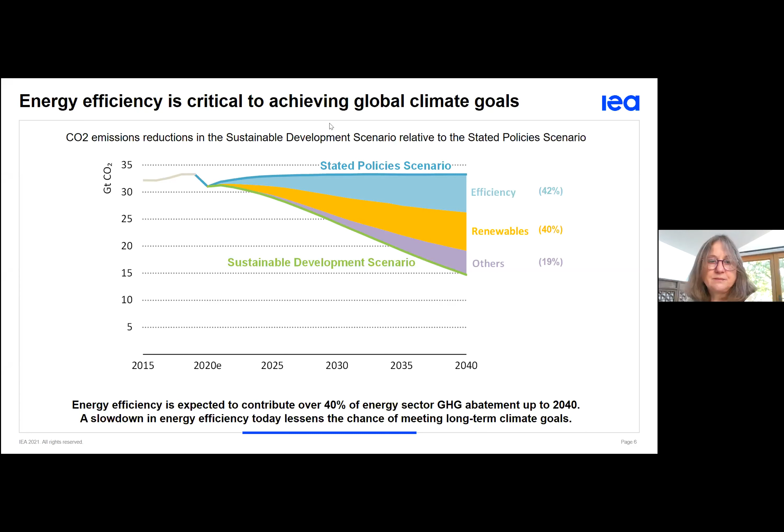The problem is whilst we have that 40% of the work that needs to be done by energy efficiency, we're actually seeing a slowdown in energy efficiency improvement. People who remember when the Sustainable Development Goals were established will remember that we were looking for a doubling of the rate of improvement of energy efficiency in those days. So it was a 2.5% improvement that we were looking for. We got there slowly, I have to say. So we were, by 2015, we were doing reasonably well. But because it had taken a while to build up to that level, we already needed a higher rate of improvement. So we already needed 3% really, rather than the original 2 or 2.5. And now we've slowed down even further, and the pandemic has been a real shock to the system. So we're looking at actually needing a 4% improvement, something like that, in order to reach those goals that I just showed in the previous chart. So we have a huge amount of work to do. Buildings, of course, will play a massive role in that process.

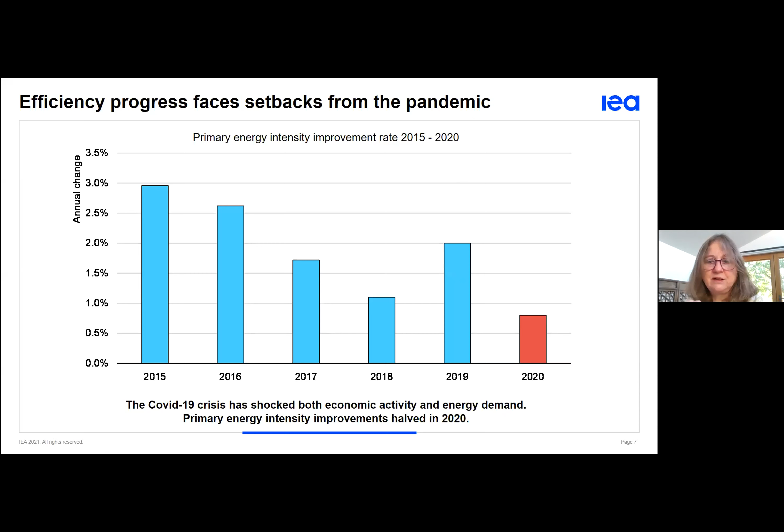Next slide, please. But there are benefits, there are opportunities as well. So in this period where governments are investing in rebooting economies, as a result of what's happened through the very, very sad and destructive health crisis the world has seen, we're saying that we're looking at how you can invest in the energy system to create jobs. And energy efficiency is actually the best place to make those investments.

This is something we're talking to governments about and encouraging. Buildings in particular yield something like 15 jobs per $1 million of investment. The important thing about these jobs is, unlike some stimulus packages we've seen in the past, they're not short-term boom and bust cycles. These are long-term jobs, local jobs, high quality. So they really are an investment for the future—a great opportunity for governments to seize this moment and make something good come out of something terrible.

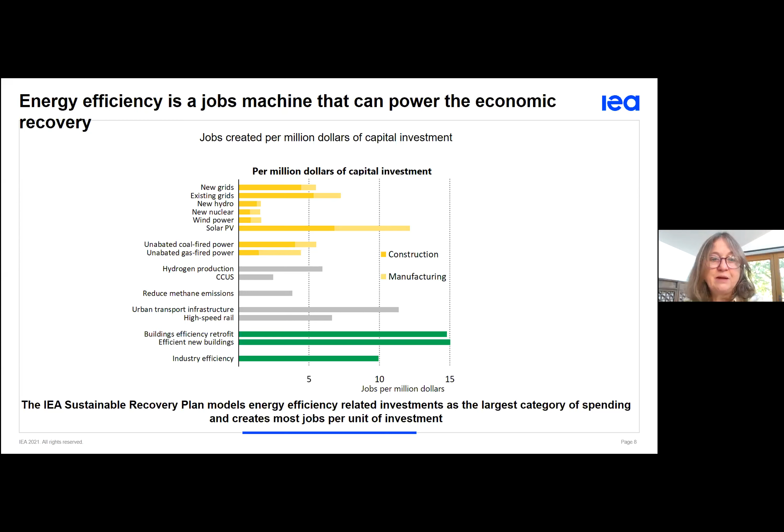We're seeing some of this starting to happen, though it's a bit uneven. Governments have announced billions of dollars in stimulus. The main area that decided to really push energy efficiency is the European Union, accounting for something like 85% of the total declared investment in energy efficiency. These figures need updating, but it gives us a theme—it shows that buildings energy efficiency in particular has tweaked people's imaginations, along with vehicles. That's important for our urban development too.

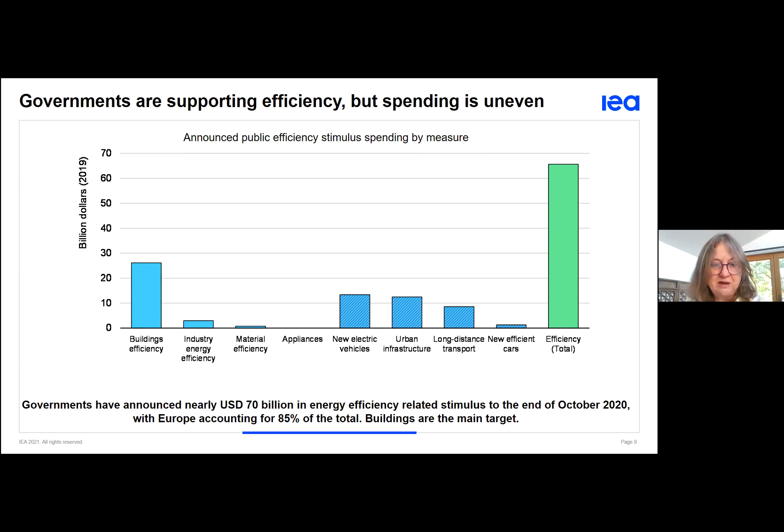Another important thing to note is that we're all talking about trying to reach an early peak by 2030 if at all possible, before seeing the reduction in emissions that we need. The only way of doing that is to really use energy efficiency to its full potential. Otherwise all other options will be too costly, and we'll miss the opportunities we have.

But the good thing is, if you look at the right-hand side of this chart, we have the technologies to make the changes we need. We know what they are today. Three-quarters of what we need for decarbonization technology-wise could come from what's already there. So it's not the case that we need massive innovation, or that there's a silver bullet waiting to be discovered. We can get on with this now.

We also have, on the left-hand side, technology performance—the yellow bar in particular is the important one for our conversation today. That's where the majority of the improvements are going to come from. So we have this package, we know what to do, we need to get on with it, and that's one of the reasons we're here today: to discuss how to use our known technologies and known practices to achieve this change.

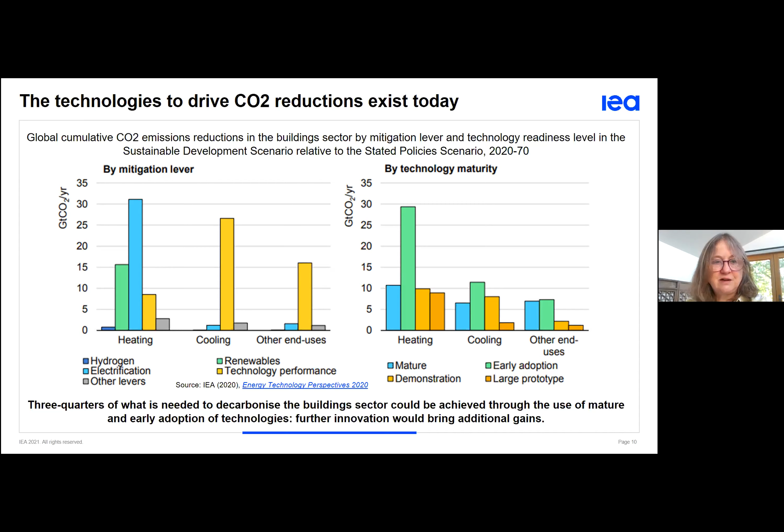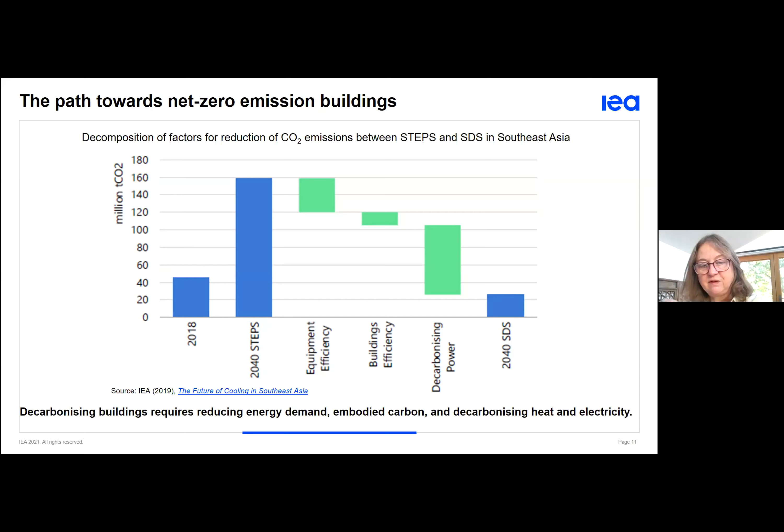Just as a last slide, to see how that breaks down in the context of Southeast Asia, our subject for today: the left-hand blue bar was observed emissions in 2018, our 2040 stated policies is the next blue bar, and then how do we get to SDS, our sustainable development scenario, on the far right-hand side? We get there through improving equipment energy efficiency, buildings energy efficiency, and decarbonizing the power sector. Those are our main chunks, and the course we're talking about today primarily looks at the first two: equipment and buildings energy efficiency.

So that's the finish of my opening remarks. We're now going to pass to Ian Hamilton to give us an overview of the buildings course we're launching today. Ian, the floor is yours.

Thank you, there we go. Thanks so much—once I was taking control of the slides, I couldn't unmute myself. Thank you, Mel.

And for all of you joining today, I'm very excited to be able to launch the online course for energy efficiency in buildings. This is something which, as someone who works in education, is a really important tool in progressing and furthering what Mel has just been describing around energy efficiency for buildings.

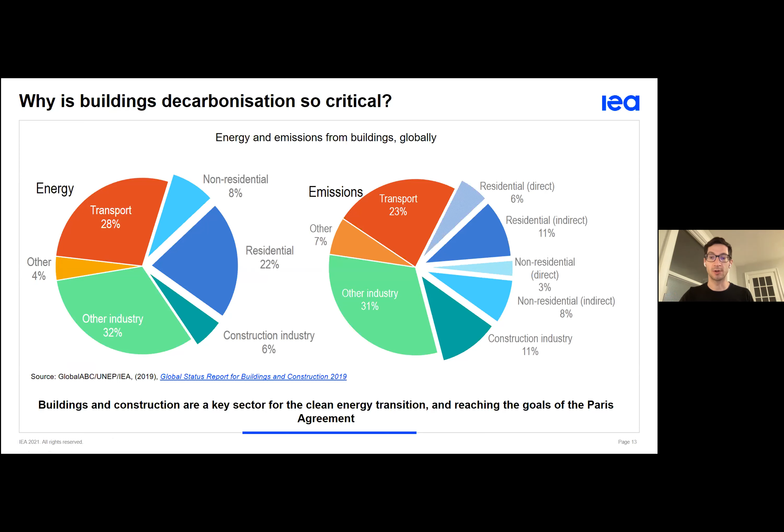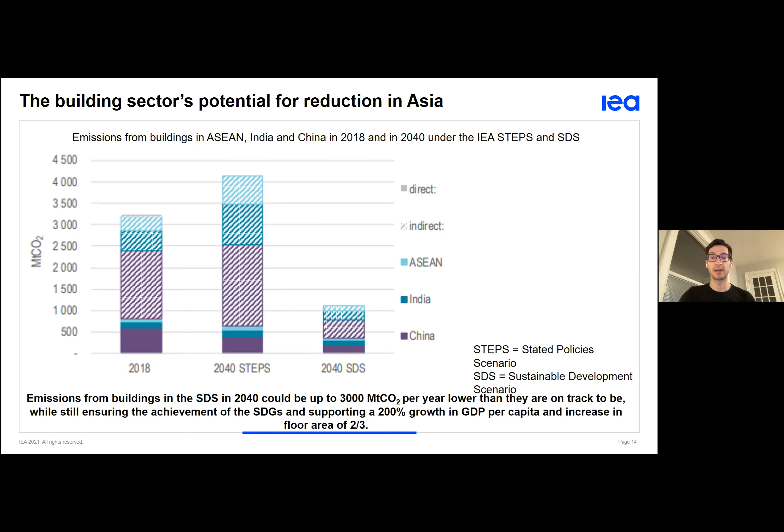Where is this going to be happening? If we look at CO2 emissions, and in particular, the appliances and the way in which buildings are being built in terms of their fuel usage, a lot will be riding on emissions reductions from the electricity system, but importantly also the performance of the building itself in terms of the fabric, how much heat or cooling is needed, and the appliances within.

These improvements are really vital, especially for the ASEAN region and Southeast Asia, to consider how we build better buildings going forward. The online course for energy efficiency in buildings is focused on building the fundamentals and expanding what policymakers, and those who work with them, understand around energy efficiency.

More explicitly around energy efficiency policies for smart cities as well. So this is a suite of courses that are now ready to go and available for registration to begin. This is what we're really excited for today. And why did this course get developed?

Fundamentally, we have both new buildings being designed and old buildings being refurbished, with a focus on quality of life, reducing environmental impact, and being part of the transition towards a decarbonized building sector. Importantly, it's also a stimulative activity that creates a lot of jobs. We spend a great deal of our time indoors in buildings, and the way we use them has changed and will continue to change. It's one of the important areas for growth in an economy.

The number of buildings is going to grow from what we see today, and that's particularly true in Southeast Asia. Many appliances continue to grow alongside that, and in particular, air conditioning ownership could increase 7.5 times by 2050 in Southeast Asia.

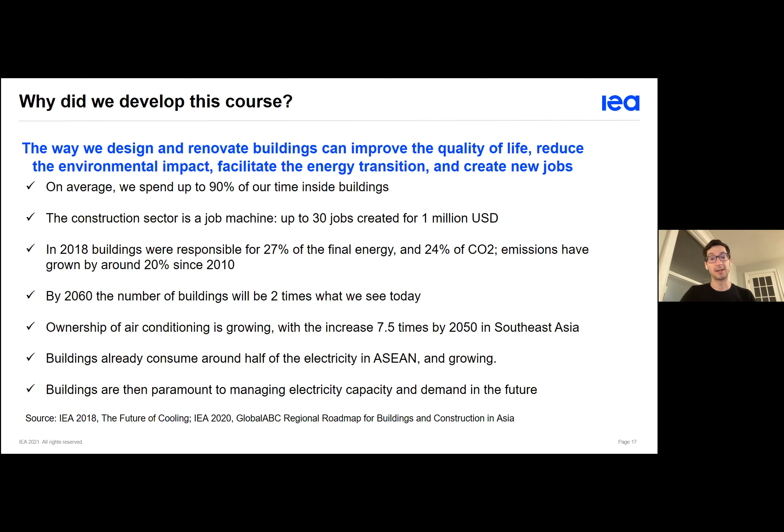Buildings are also an important part of the overall picture for ASEAN in terms of how much electricity is being consumed and will continue to as part of that demand. So really, buildings in the region are incredibly important. What this implies is that to protect for the future around how much energy is used and the cost to consumers and building occupants, building and refurbishing so that they are most efficient is really vital. So what does the course do?

Well, it gives you an understanding of what energy efficiency in buildings means. It tells you about the technology and design options available to improve energy efficiency of buildings. It describes the policies and the various forms in which they can be applied, and also outlines the investment and financing for energy efficiency in buildings.

Policies and finance are really vital to improving what we're doing with buildings, but so too are codes and the role of codes and building standards around how to structure and promote energy efficiency in buildings. So we also describe the ways in which you can measure, evaluate, and verify energy efficiency.

This is really important to be able to determine: are you on track? What is working? What is not working? And then who's responsible? Who are the different actors who can be involved, and how do they participate to ensure that building improvements are happening?

And then there's a variety of other additional resources in terms of workplace for energy efficiency issues in buildings. This is meant to be a place that you can go and learn, but also come back to and access the resources that the IEA has for this journey.

So who is it for? It is designed for those making policy decisions, whether at the national, state, or city level. It's for architects and engineers who want to better understand the details around energy efficiency and design ideas. It's focused on those who might be in financial institutions, and finally also research organizations, NGOs, and anyone else really interested in energy efficiency more broadly. I think this course can offer a lot.

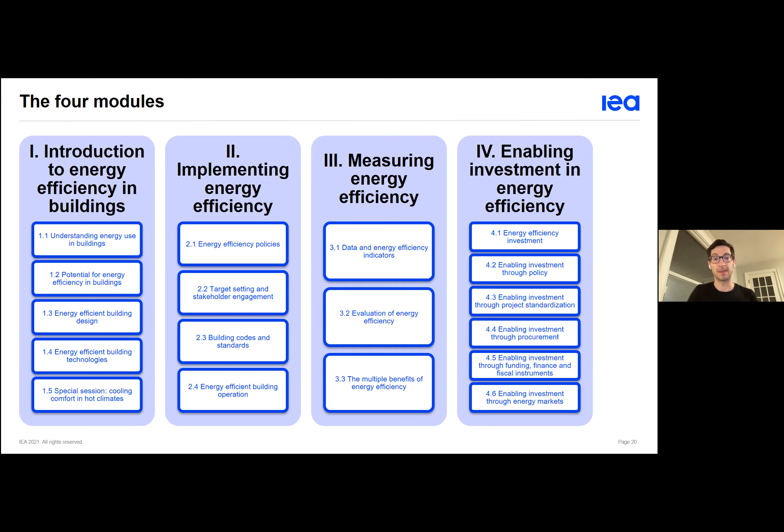The format of the course is based on the MOOC model, the Massive Open Online Course model, and it's available 24 hours a day, 7 days a week. It's approximately 30 to 40 hours of course time across 6 to 8 weeks to complete. There's a variety of material available: videos, reading, slides, examples from Southeast Asia as well as other countries. There's downloadable content, and one evaluation per module. There's also a final evaluation, meant to really ensure that you have a good understanding of the content.

Importantly, there's also a link through to the IEA Energy Efficiency Policy in Emerging Economies LinkedIn group. We see this as one of the ways you can interact with instructors—some of the course instructors—but also within the wider group and community working together on this. In terms of certification, if you complete over 75% of the module, you'll receive an overall certificate, but we of course encourage you to complete the whole thing.

What to expect? This is an example where there are videos—instructional material, videos from our experts at the IEA speaking about different angles of energy efficiency, whether that's policies or technologies. There'll be detailed understanding around certain concepts, or illustrations of analysis undertaken with the IEA and partners. And then a series of evaluations and tests to make sure the information is really founded.

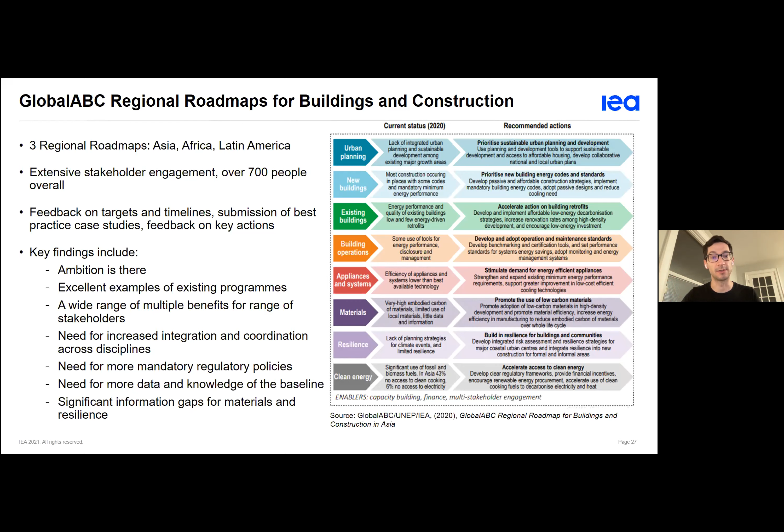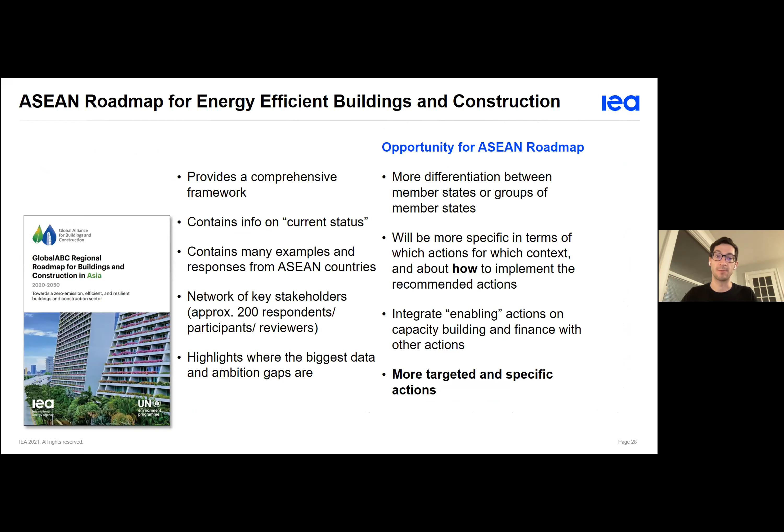This builds on our previous roadmap exercises, looking at regional roadmaps, which were high-level but extensive work covering policies, technologies, current status, and recommended actions to be undertaken. The work we're doing with the ASEAN roadmap is really to build on that regional activity and engage with yourselves to understand and describe the strategies for how those roadmaps could be implemented to achieve a more sustainable construction and building sector.

One of the things we'll do over the next month or so is continue to build on that, and we really invite you to participate through a survey process and an engagement process. I won't take too long, as these slides will be available for others to see, but it covers a variety of themes in addition to buildings themselves: the urban environment, clean energy, and resilience of buildings.

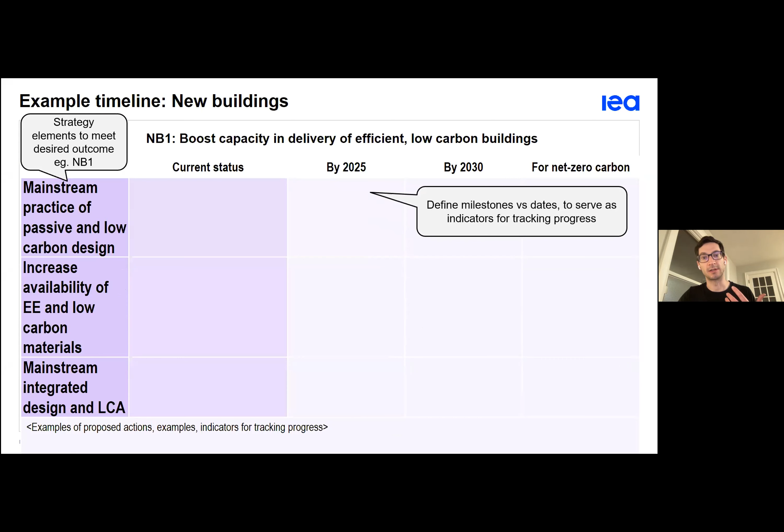We go through a process of building up from the bottom, again focused on strategies. What we're aiming to do, with regionalization and strategies in mind, is build out a picture of how we implement. So we continue to have strategy elements, milestones for what could be achieved by what time, and then also targeted actions that could be undertaken by different groups.

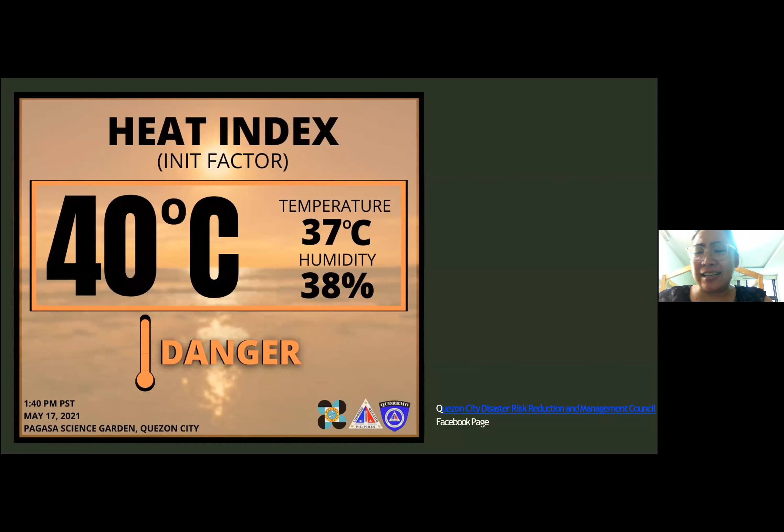That adds to the increase in the need for cooling energy here in the Philippines. And then factor in that we're still in lockdown because of COVID-19, so a lot of people are mandated to stay indoors. I saw in Ian's slide that we spend 90% of our time inside buildings, but because of the lockdown maybe it's around 98% now. So you add the fact that it's very hot, the increasing temperature due to climate change, and the lack of green spaces where people can go for a break from being indoors, and you see the huge potential for energy efficiency, especially when it comes to cooling here in the Philippines.

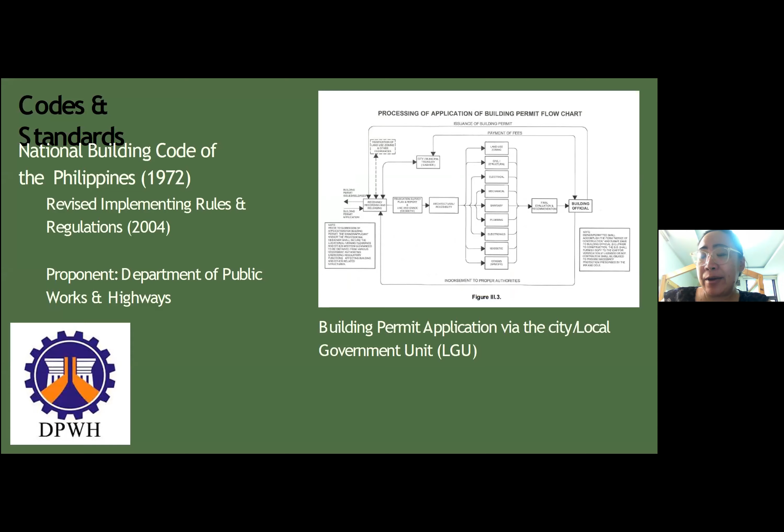But there's still a bit of good news when it comes to energy efficiency. In 2015, finally, the Philippine Green Building Code was created. I think this one is just the same as the National Building Code. The proponent is the Department of Public Works and Highways, but this one was created with help from professional organizations in the built environment, and funding from IFC. This was in 2015, but the sad thing is that it was only issued as a referral code, meaning it is not mandated, unlike the National Building Code where you have to follow the standards and codes inside it. This one is just like a referral.

There were some pilot cities that were able to implement the Philippine Green Building Code, but the sad situation is that it's not being used nationwide. Only several cities are using it, and it's not mandatory. This was done in 2015, and six years onwards.

I'm speaking from a professional standpoint. I haven't heard any feedback on how it is now, because usually codes are reviewed every five years. So I'm also curious on my part, what has happened since then? So this is on the government side.

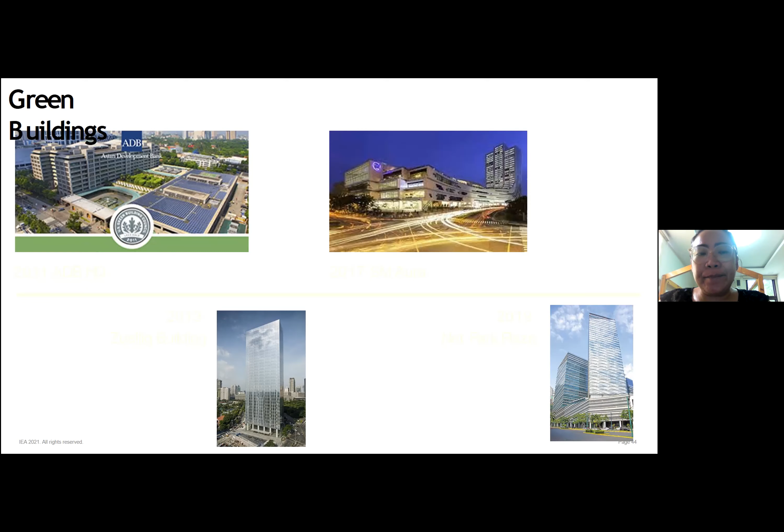But flash forward to 2019, it has really grown exponentially - the knowledge on green buildings, the professionals working on it, and even the appreciation of the private sectors like developers. They've seen the benefits one can get from having green buildings and having your buildings rated.

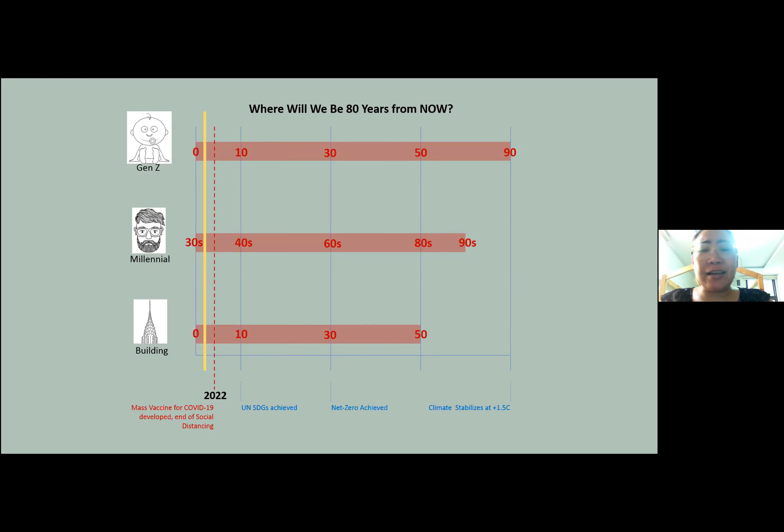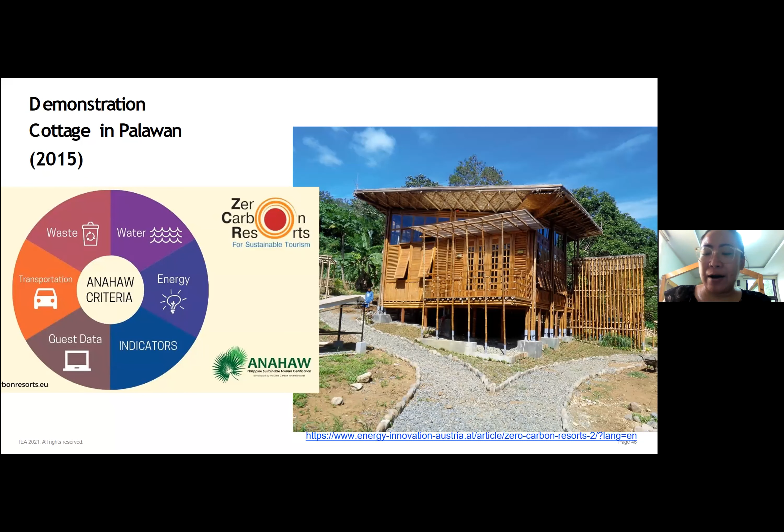And then my last slide is just, I usually show this to my students in architecture, and it's really about thinking about sustainability and why are we doing so much effort with regards to energy efficiency, climate change, and sustainability.

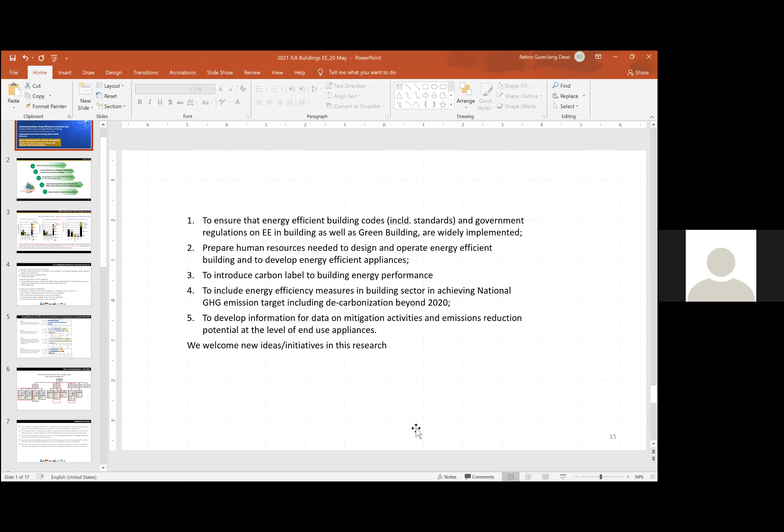Thank you very much, and good afternoon from Indonesia, but now maybe in Europe it's still morning here.

I would like to share my experience in advancing building energy efficiency, particularly in Indonesia, related to how energy efficiency activities serve as mitigation measures for our NDC, the nationally determined contribution already submitted as part of the Paris Agreement, targeting 2030. I would like to share how to quantify the emission reduction from these mitigation measure activities.

We can also use this model to quantify emissions at the city level, maybe the region level, as well as the national level or in Southeast Asia. This is the idea of how to assess this.

I would like to group our discussion into 5 parts. First is talking about greenhouse gas emissions in the energy sector, and part 2 is energy efficiency as a mitigation measure — not only as mitigation, but also as a new source of energy, because when we make it efficient we can use it for other purposes.

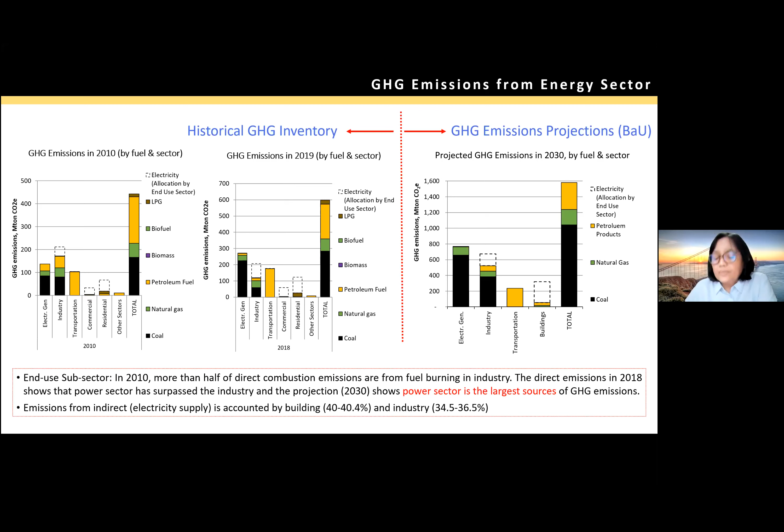We see energy efficiency measures on the demand side. First, we have a target in energy efficiency for 2025: 6% in industry, transport, household, and commercial building. This household and commercial building figure is almost 6%, but the percentage is not for the sector alone, it's for the total sector.

Efficiency standards and labeling implementation make things more efficient, and now I think many countries have implemented this. Also, efficiency standards, even without using standard labeling, because of trajectory technology, efficient appliances can be used by all sectors.

Indonesia's NDC 2030 also has a target for how much energy efficiency can reduce emissions in one country, and other countries' NDCs can also contribute to reducing emissions particularly through energy efficiency.

Energy efficiency measures on the supply side: yes, of course, even if we work hard on efficiency on the demand side, if the supply side still has a high carbon footprint, it seems like nothing, because the emissions released indirectly are still high since the supply side is still using more fossil fuel, particularly coal, and the carbon footprint is still high.

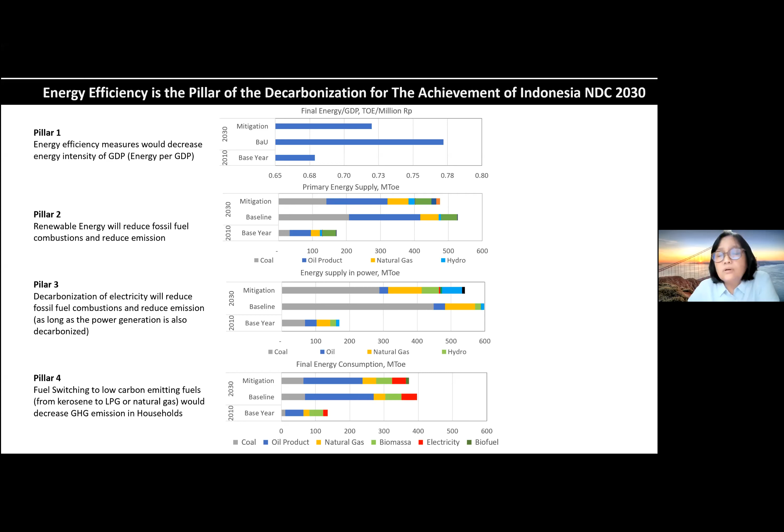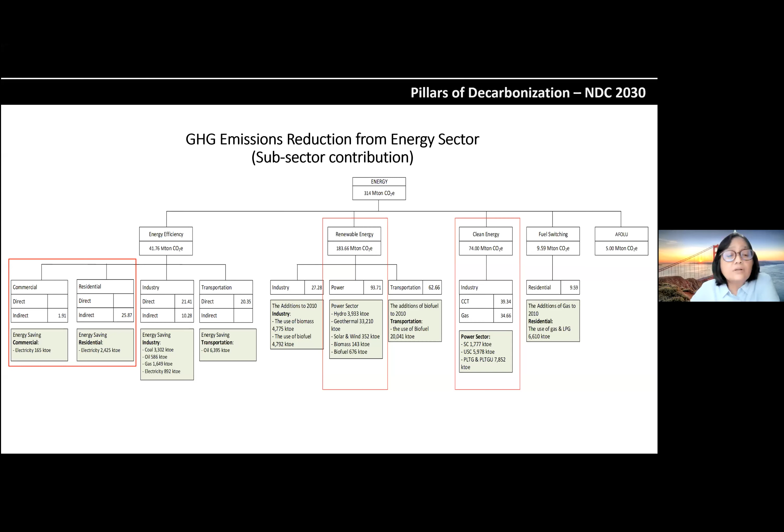The dynamics of buildings are driven by population growth, economic development, per capita income, and commercial sector development. For residential, increasing per capita income increases energy demand as well, and for commercial buildings, increasing size of the service economy and modernization of building equipment will result in increased energy consumption.

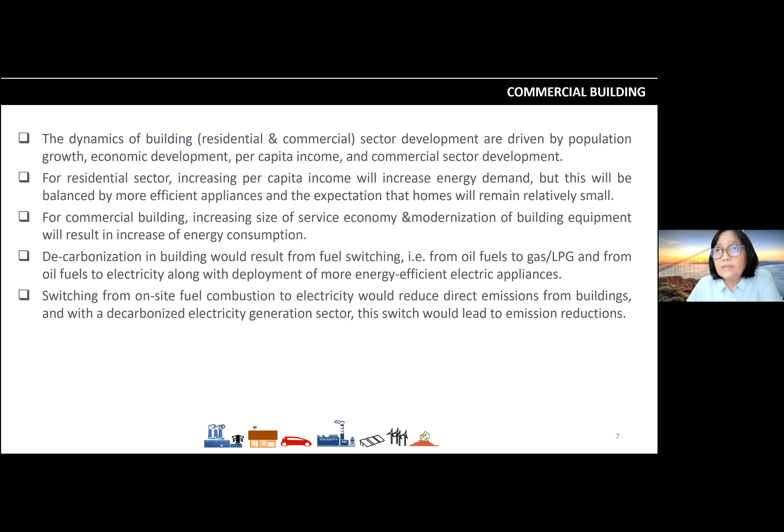Decarbonization in buildings would result from fuel switching, and the biggest impact comes from energy efficient electric appliances. Also, switching from on-site fuel combustion to electricity would reduce direct emissions from buildings, and decarbonizing the electricity generation sector would give an even greater impact on GHG emission reduction.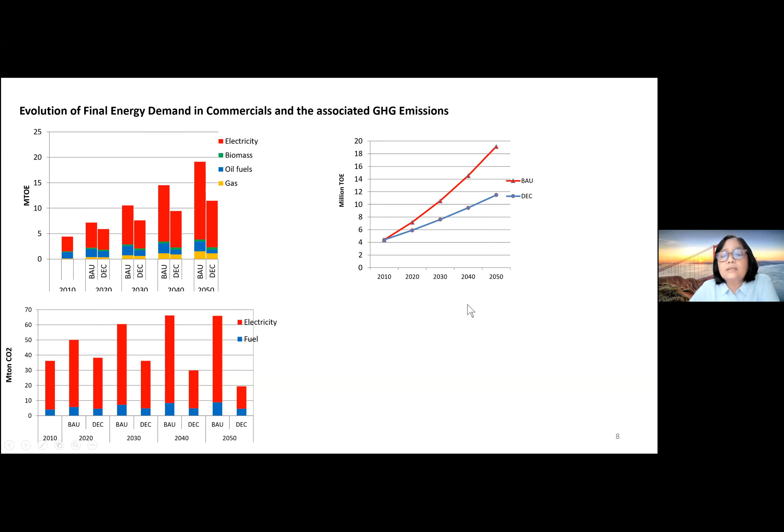And then this is the total reduction that we can achieve in 2050. But I have experience on one case only, if efficiency standard and labeling as policy measures, and then what happened for the result of the model itself, similar like this one, this in the national level, but focused on the commercial building, and this one is focused on residential as well as commercial.

This is the parameter that we use: GDP, population, household, and also some other parameters like the area of the building and also the household, number of households, and then how they can increase the area because of the development in this subsector.

And then this one, the right one, this is the kind of technology that we use: cooking, lighting, etc. And then if we do nothing until 2050, this is the share of each of these appliances for energy. Then this is the consumption of this one, cooking, lighting still dominated.

And then how to reduce this emission, we can run the model with the end use model, and then we can have the result if this is the business as usual. And then if we implement the first unconditional target under the NDC and extend it to 2050. And this is countermeasure A, and then another one is countermeasure B.

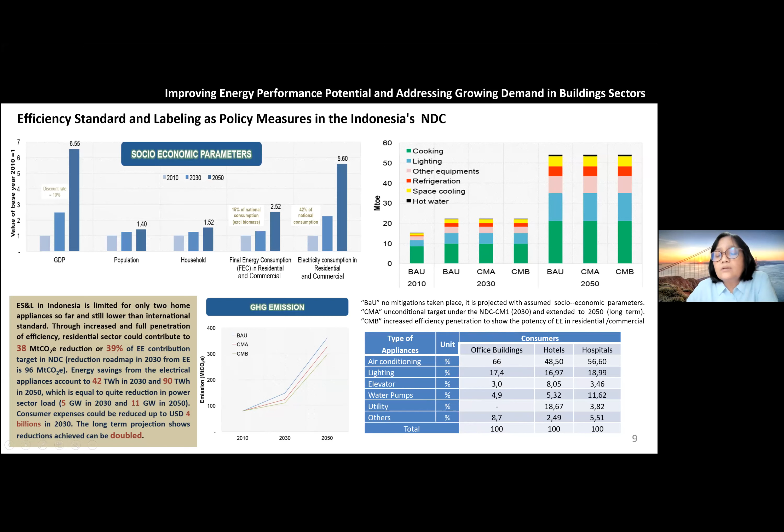And then we have also information about the type of energy, the share of appliances in office building, hotel, and hospital that we can use for the reference here. And then this is the model itself.

The methodology where we have used AIM Enduse is a rather complicated model because we can use the level of type of technology, even in electric appliances. First, we have to estimate service demand. Based on the service demand, we can have how much actually electricity have to supply.

And this one is the electricity service demand, influenced by population growth, economic growth, lifestyle. For example, what happens in 2050, maybe our community is more efficient or still traditional, or modern then expensive, and then need more energy, is not efficient. For example, this is just an example.

Then we can set in 2050 what kind of community will happen, and then we can estimate how much actually the service demand, particularly for the electricity. And then the technology selection and others can be run with optimization based on how much the electric service demand, and then appliances or technology.

And we have a database in one sector. We almost have 100 databases for technology, and also we use energy price as an optimization parameter, energy type, energy constraint, and emission factor, and also fuel availability.

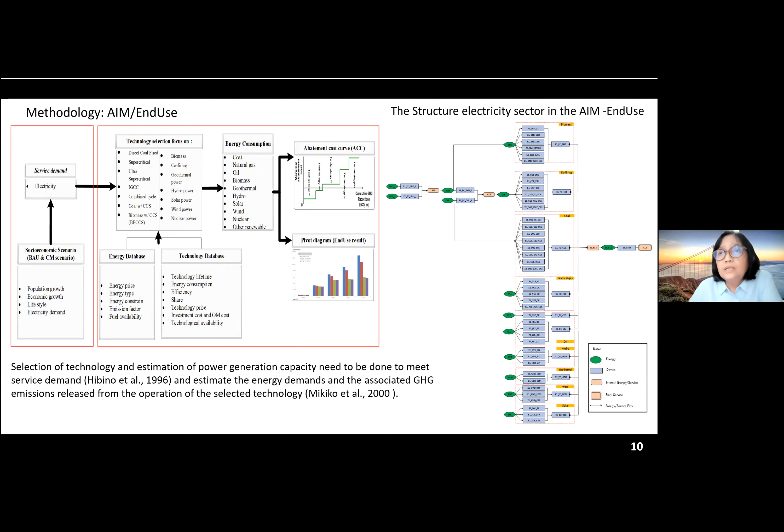But now the rest is only Asian countries, so because of this we now use a global model, a global model between Asia and also Europe. As I mentioned before, we can select this only for the building commercial and household sector, and this is a type of the share of each technology.

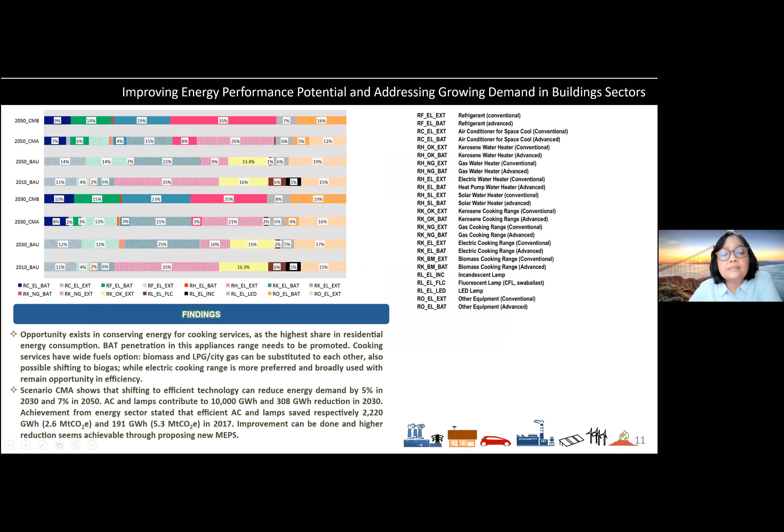And these are the findings, the opportunity scenario, and how much we can actually reduce emissions based on the appliances. There is some of our experience I would like to share, but because there is much to give information, I think from the presentation you can just read it here. Energy efficiency measures on the demand side could be implemented when the following conditions prevail.

For example, ESCO is a good idea, because with support from ESCO, the building can implement energy efficiency, since the cost for investment and operations can be covered by the ESCO. Then the reduction in energy consumption can trade off for the payment of the investment cost and expenditure.

Energy efficiency measures on the supply side could be implemented when the following conditions prevail. I have to discuss the supply side because there is no point if we only focus on the demand side when the supply side does not also reduce greenhouse gas emissions.

The required policy for the above issues includes financial support and incentives. We don't want to use the term subsidy anymore, because why apply for an incentive? Because this is good work, and why shouldn't government give an incentive to people who are already efficient or using clean energy, then we apply for the incentive.

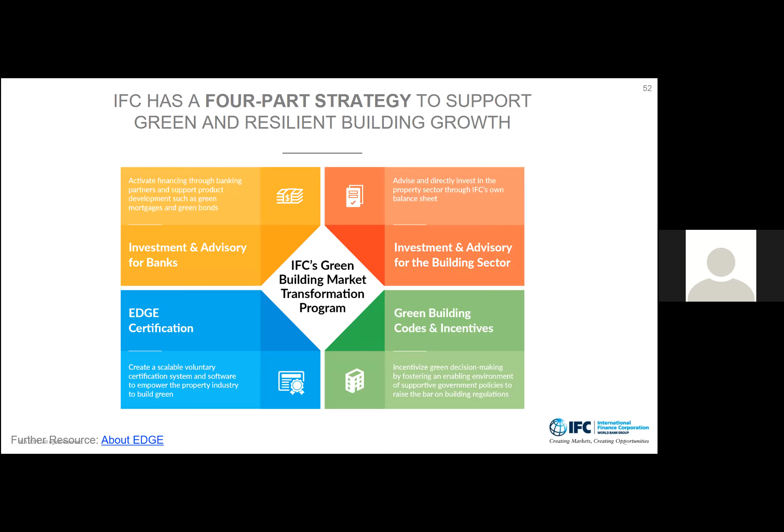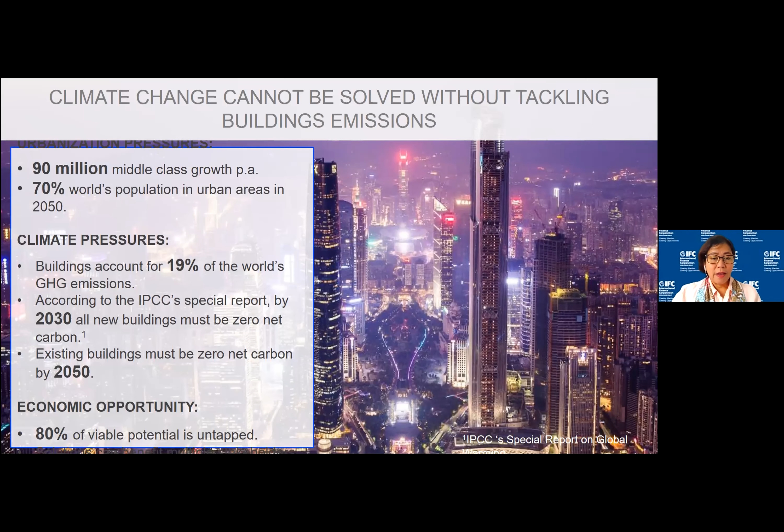The building sector is a major culprit, accounting for 28% of energy-related greenhouse gas emissions, and it consumes more than half of all energy. And it's expected to grow further. By 2060, the total floor space will most likely double compared to what it is today. So how to balance the demand for a significantly larger built environment while minimizing resource depletion and carbon impact is really critical to our future.

So here, IFC really commends IEA on coming up with a MOOC on energy efficiency in buildings, which is very important.

Buildings can pose threats to the planet, but if built sustainably, they actually bring value to all stakeholders, from builders, buyers, and banks. And for policymakers, providing incentives and coming up with regulations for energy efficient, sustainable, or green buildings can really bring results to their nationally determined contributions, for example, and more importantly, also more efficient infrastructure, which can translate into the country's more competitive businesses and economy.

Now let's take a step back and define exactly what we mean by green building. It's not enough to just self-declare that a building has met a standard; it has to be certified by a reputable certification system. And to this end, the building must also be at least 20% more resource efficient, including energy, compared to a comparable baseline building in that local market area. Resource efficiency includes energy efficiency, which is the topic of our discussion this afternoon. And finally, in order to satisfy green building finance requirements, which become more important, projects must have quantified impact reporting, which includes energy, water savings, or reduced GHG emissions.

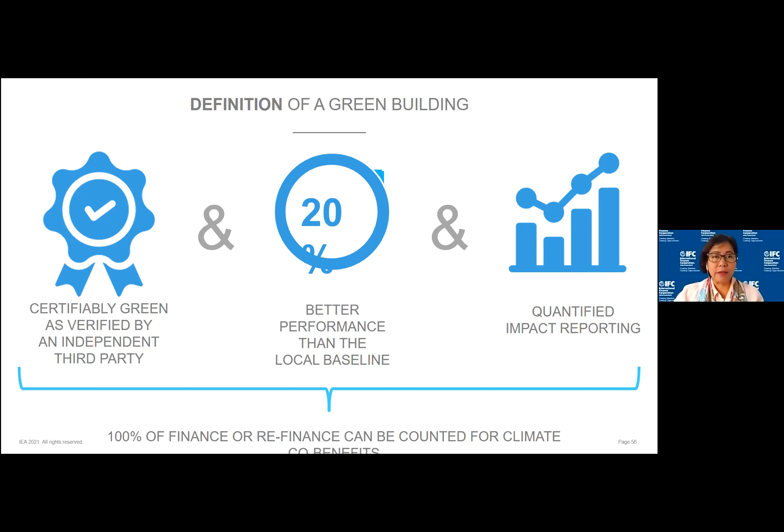To promote resource efficient buildings, IFC, for the past more than 10 years, has developed the green building market transformation programs. Within that, we also developed the Edge software, which is the first of its kind, and it's free of charge for anyone to sign up and use. It's available through edgebuildings.com. The complexity of the application, because it's very simple and intuitive to use, is really hidden beneath the user interface.

So it helps architects, engineers, and investors to make it easy for people to cut back on the resource intensity of their building's design.

Edge is possible across all sectors. It can be new buildings, existing buildings, homes, hospitality, hotels, offices, hospitals, campuses, schools, industrial warehouses, and even airports. One is actually Edge certified, in Clark, the Philippines.

Here is just a sample of our Edge certified portfolio across the globe. You can see various types of buildings covering multiple countries.

IFC has been actively working on this in emerging markets across Asia, Latin America, and Africa, and we're also involved in developed countries, but we focus more on emerging and developing countries.

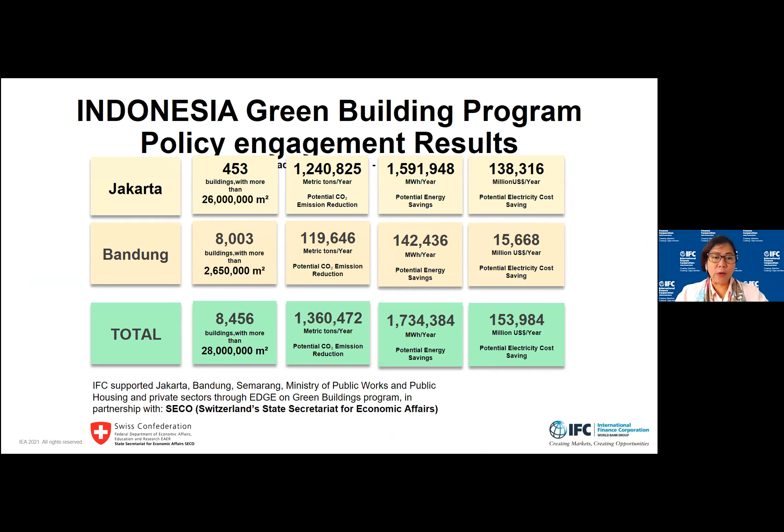I mentioned the green building course in university. This is work we do globally, but to give an example, we work in Indonesia and in Vietnam. In Indonesia, since January 2019, we partnered with 5 universities: UI, ITB, Ibu Dewi's campus, and...

...UGM, ITS, and Undip, where IFC developed the training model and we do training of trainers for the lecturers, who then transfer the knowledge to students as an elective course within the Department of Architecture. This year we've also added University of Tarumanegara in Jakarta, and in Vietnam we've partnered with 4 universities already.

Let's look into the incremental costs and benefits now. Actually achieving 20% savings in energy, water, and materials only requires a few practical adjustments. I think people in the audience today are very familiar with energy efficiency and how you cut it.

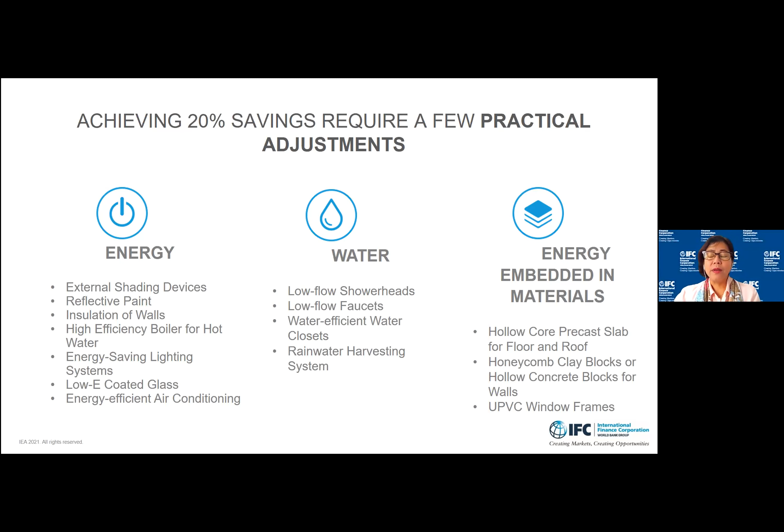Now, talking about costs. It's been perceived that green buildings are high cost and all that, but IFC has done research showing it's actually much lower than market perceptions.

A case in point is Ciputra in Indonesia, where they saw less than 5% incremental costs with a payback period of less than 2 years. Similarly in Vietnam, our partner Capital House reported just a 1% increase. It's really possible to bring this lower if the concept is built in at the design stage, very early in the process.

In terms of the benefits and returns, another IFC study shows that across different types of buildings, the returns are possible and quite high. The payback period across the board is less than 2 years. Of course the incrementals range depending on the type of building, but when you compare the cost and benefit, it's actually quite comparable and significant.

I have a few case studies to show here, but I won't dwell on them much, just to give you a flavor that this has actually been done, implemented, and brings results.

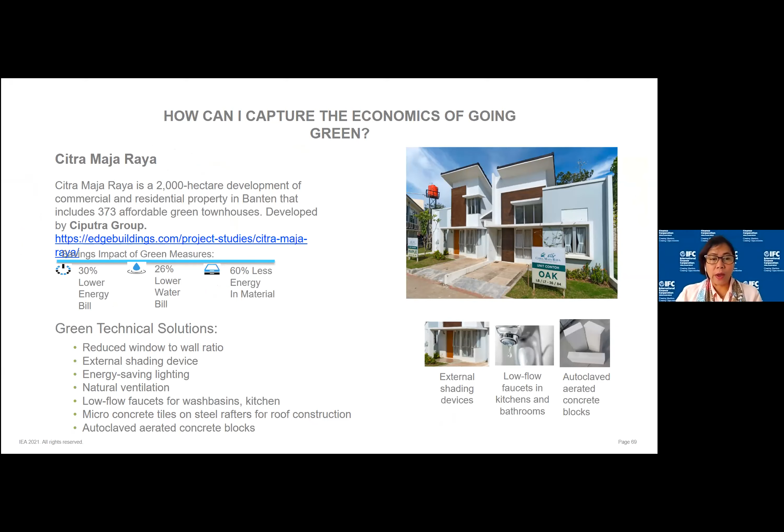Another example from Indonesia: this is Citra Maja Raya by Ciputra. I mentioned the incremental cost is less than 5% with a 2 year payback period, and they're able to save 30% lower energy bills for homeowners.

So what exactly is needed? There's a private sector role, giving examples, demonstrations, and directions. But what's also important is government partnerships.

There are so many implementation issues and challenges, but incentives, if governments put them in place, don't have to be fiscal incentives—they can be others. It doesn't have to be fiscal or tax-based; it can be bonus density, expedited permitting, grants, loans, technical assistance like awareness raising, training, knowledge, net metering, public campaigns, and legislation.

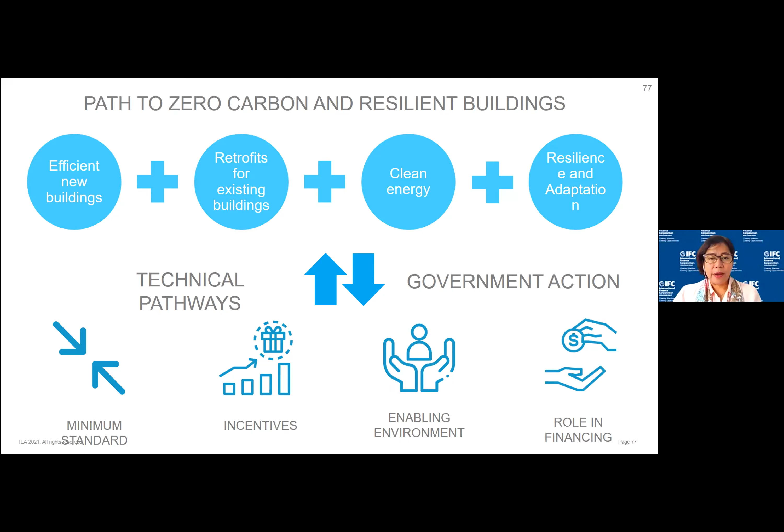At IFC, we begin with 20%, which is the standard, and if people can make their building more energy efficient, we can issue EDGE Advanced at 40%. If they want to go all the way, either through energy saving on site, achieving 100% through renewables, or topping off with carbon offsets, IFC has already introduced what we call zero carbon buildings. We already have an example, happy to say, from Manila.

This is Arthaland, the first Edge zero carbon certification, and they have won awards for that.

The great news is that the tools are already here to make this happen. IEA has introduced online tools as well, bringing in what's required by private sectors, practitioners, and governments. From IFC's side, we have Edge, Building Resilience Index, and Apex for cities.

We also work with finance institutions and have case studies available, plus research, partnerships, and disclosures, including our partnership with CDP. This brings together not just the supply side but the demand side too. We really want to make sure the market is transformed across all these various pieces.

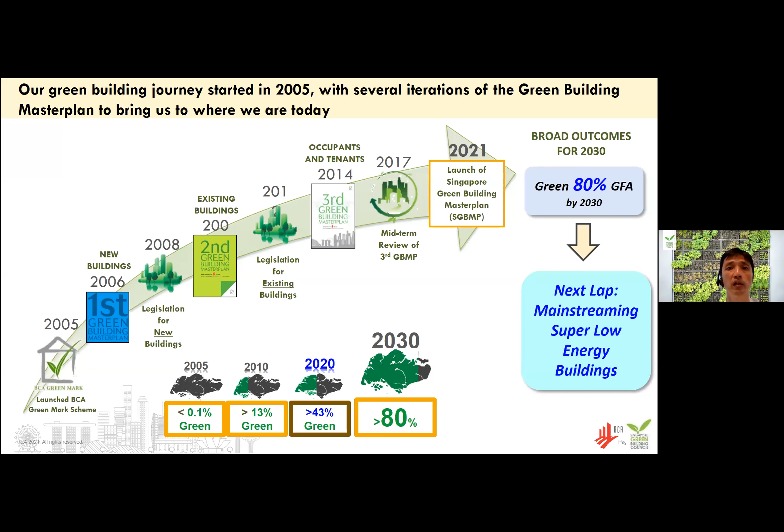In view of that, in 2021 we launched a new version of the Singapore Green Building Master Plan. With this new Green Building Master Plan, we strive for higher long-term ambitions for green buildings, and we want to make super low energy buildings mainstream, pushing for wider adoption of these buildings.

The journey of the 2021 Singapore Green Building Master Plan actually started last year, in 2020. BCA and the Singapore Green Building Council co-led and set up the Master Plan Community, which consists of more than 80 industry stakeholders from different points of the value chain, such as consultants, developers, contractors, suppliers, researchers, and others.

In setting the new master plan, it's important to better understand the barriers faced by practitioners on the ground, as well as to understand from the industry what potential there is to stretch for higher targets. The early decision was to reach out to a wider segment of stakeholders through various engagements in order to co-create this new vision for the new journey.

With that in mind, we successfully engaged 5,000 individuals through the process of developing this new master plan. All this accumulated into the release of the public engagement report earlier this year in February 2021. Through the feedback and suggestions gathered, the committee had collectively shaped the vision, key outcomes, and initiatives that will effectively help drive the green building agenda forward.

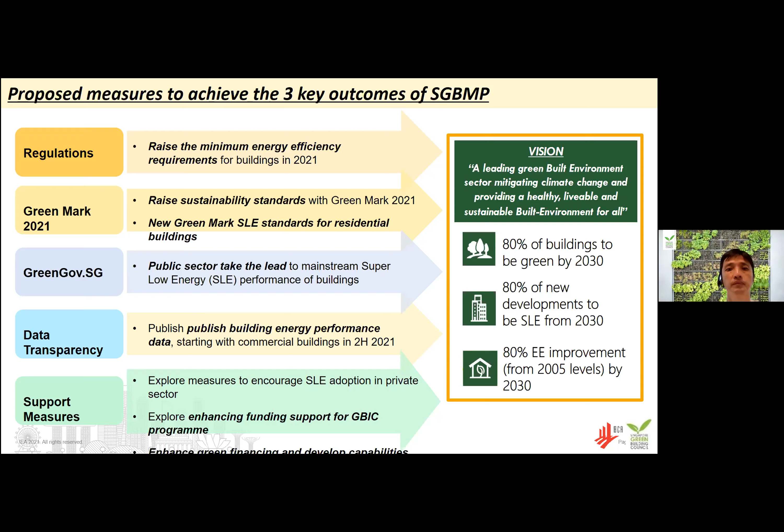BCA will also be reviewing the Green Mark scheme to raise the standards accordingly. Since 2005, Green Mark has... sorry - BCA has raised the minimum energy efficiency requirements for new buildings and existing buildings undergoing major retrofits to be 50% and 40% more energy efficient compared to 2005 levels, respectively. The current standards, on the left side of the chart, are 30% and 25%, so that will be raised to 50% and 40%.

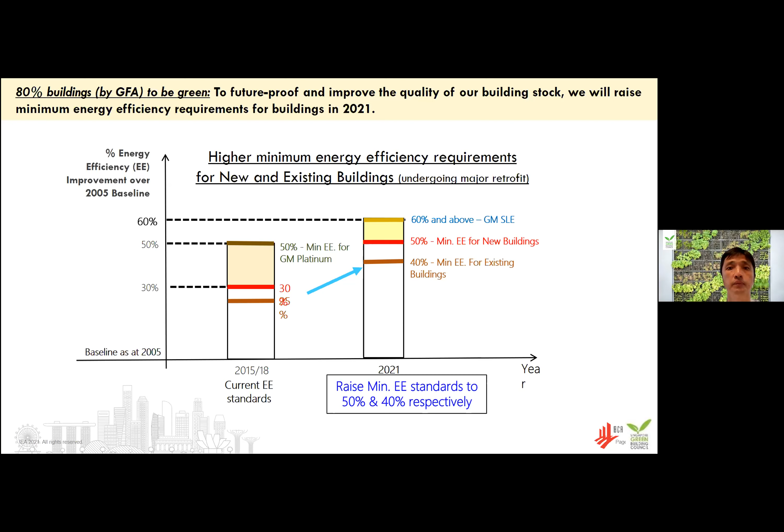BCA will also be reviewing the Green Mark scheme to raise the standards. Since 2005, Green Mark has been a key lever and performance benchmark for various green policies. The new Green Mark 2021 is currently in the piloting stage, so you can visit the website for more information.

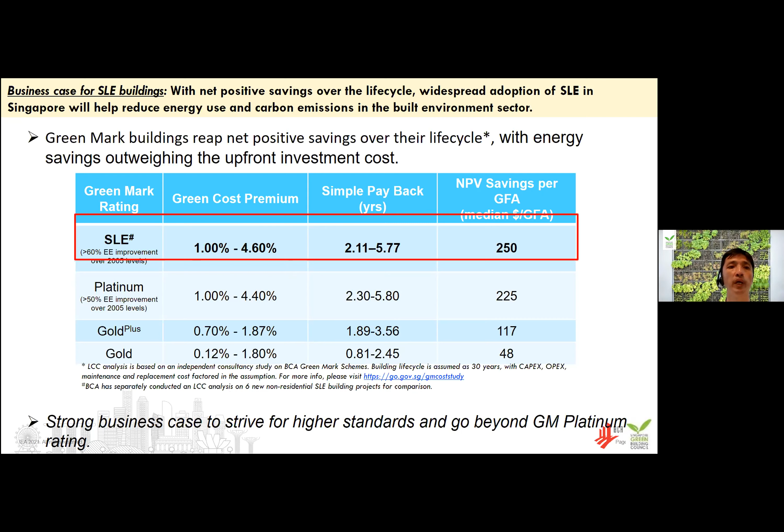Currently there has been encouraging progress on green buildings striving to go super low energy. When we started the super low energy scheme in 2018, there were only 14 projects. Now the number has grown to 43 projects awarded super low energy building certification, with 20 more working towards certification. To further create demand for super low energy buildings, the government will also take the lead to give a stronger push through the GreenGov.sg scheme.

This is the third outcome: to strive for 80% improvement in energy efficiency by 2030 for best-in-class buildings, through the support of research and innovation and deployment of new technologies to the market. There is a Green Building Innovation Cluster, or GBIC, program that supports research and development, and helps researchers and innovators demonstrate green building solutions through prototyping. We want to strengthen research and innovation partnerships and collaborations to develop more energy efficient and cost-effective technologies that can support the push for more super low energy buildings.

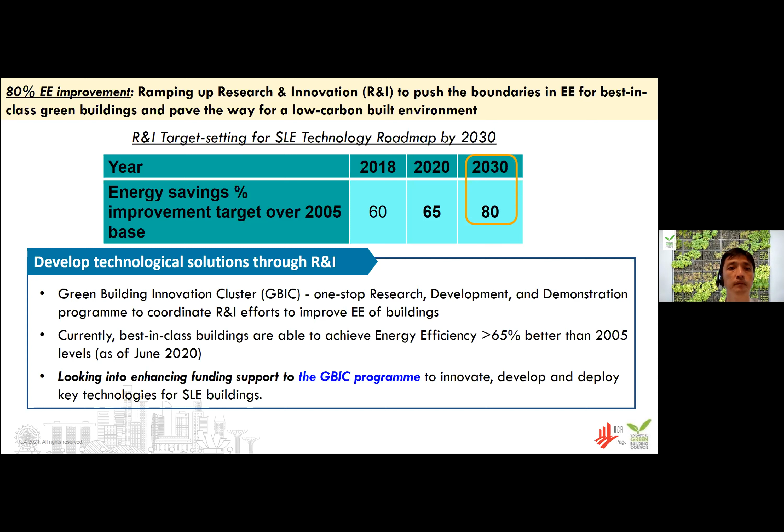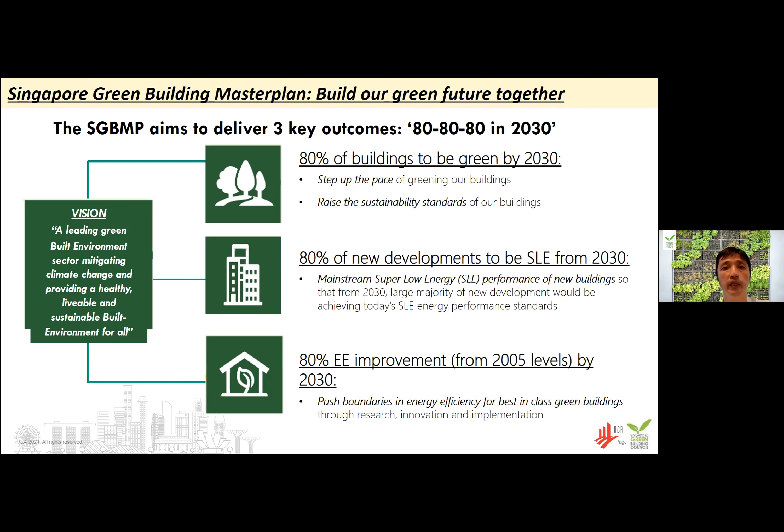In summary, these are the three key outcomes Singapore is targeting to help us green more buildings by 2030 - the 80-80-80 in 2030 targets. That's my last slide, so thank you.

Always impressed with the progress that Singapore has made on these issues, and the kind of leadership shown for the region and globally as well - hugely important examples and experience. I particularly liked your point about data sharing. I think that's something we don't perhaps talk enough about. If all of the separate groups that we need to bring together - different types of stakeholders - to have this nose-to-tail energy efficiency process in buildings, through design, construction, and through to resilience, that sharing of data is a hugely important part of that process.

We've heard really interesting things today that will certainly strengthen the roadmap already that we're working on, as well as contribute potentially new examples to the training. So thank you everybody for that. We have a few moments for some questions.

I would like to kick off by going back to this point about making energy efficient, comfortable accommodation available to low-income groups. Maybe we could just go round the panelists one by one briefly, and just very brief responses, please, to see what you think working together, the private sector and the public sector can do to make this more available. So I'm going to start with Andrea, if I may, from the Philippines.